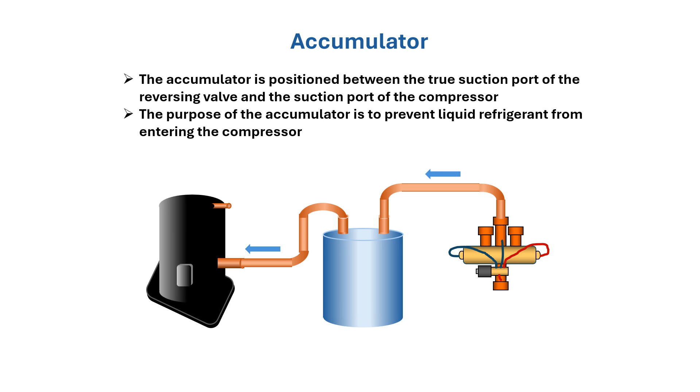In this video, we will discuss the accumulator's function and issues. The accumulator is positioned between the true suction port of the reversing valve and the suction port of the compressor. The purpose of the accumulator is to prevent liquid refrigerant from entering the compressor.

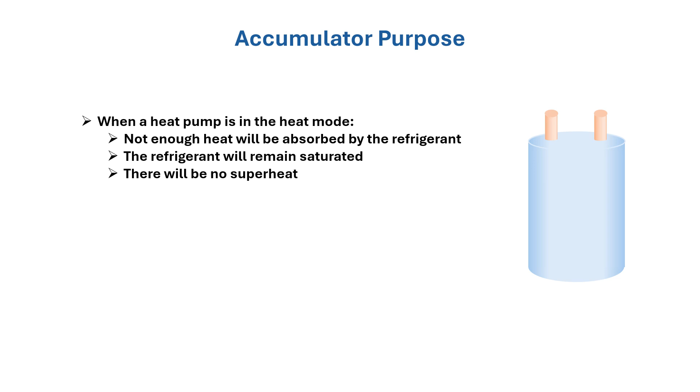When a heat pump is in the heat mode, not enough heat will be absorbed by the refrigerant. The refrigerant will remain saturated, there will be no superheat, the outdoor coil will frost up and ice will build on the coil. An accessory must be put in place to make sure only vapor refrigerant enters the compressor. The accumulator in a properly charged system will prevent liquid refrigerant from entering the compressor.

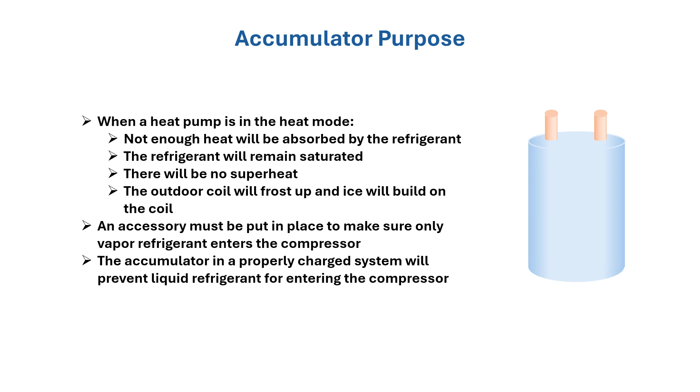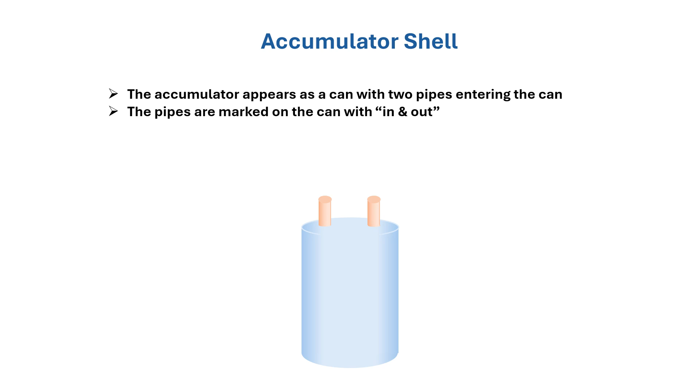The accumulator appears as a can with two pipes entering the can. The pipes are marked on the can with an in and an out. It is important that when replacing the accumulator, the pipe from the reversing valve be connected to the in pipe, and the out pipe be connected to the suction pipe of the compressor.

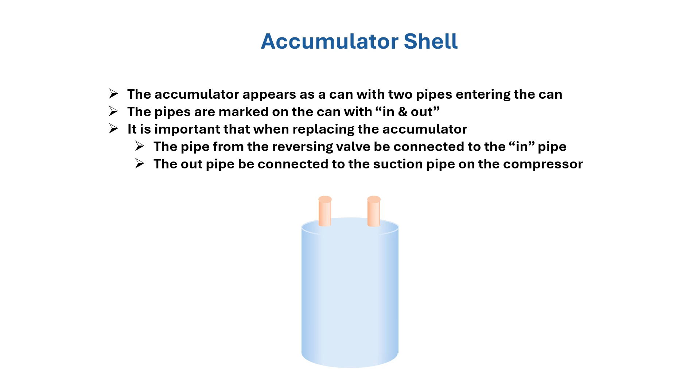The picture on the right shows the pipe arrangement of the interior pipes. The short pipe is the refrigerant coming from the true suction port of the reversing valve, which may contain saturated refrigerant, both liquid and vapor. The pipe with the J bend is the line back to the compressor.

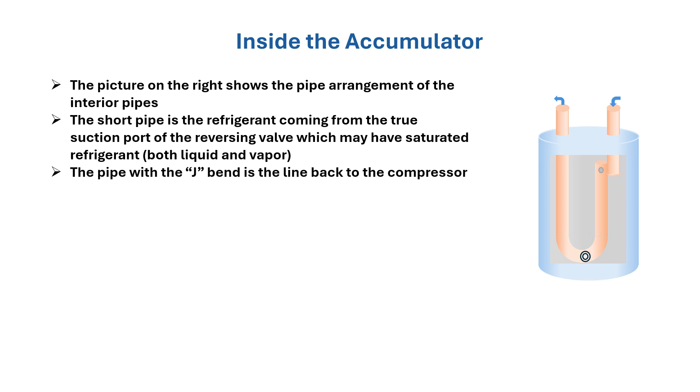At the bottom of the bend is an opening with a screen for oil to return to the compressor along with liquid refrigerant. Behind the large screen is a small opening which meters the refrigerant. The small hole at the top of the pipe is to aid with pulling vapor refrigerant back to the compressor. The top of the pipe is fully open to pull vapor back to the compressor.

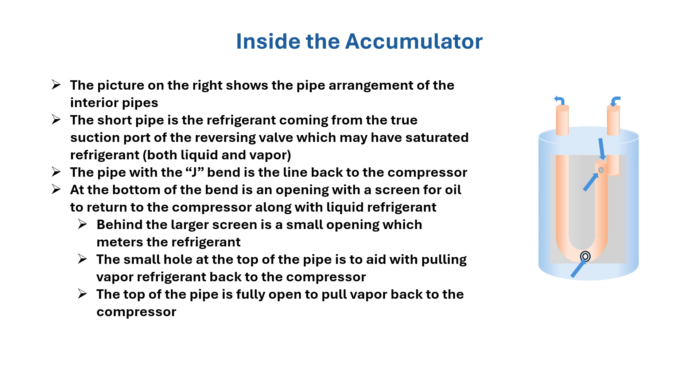When a compressor fails in a heat pump, most technicians may not know the cause of the failure and will replace the compressor and capacitor only. This may be a mistake if the cause of the failure is not known. Oil and refrigerant should be the only items flowing through the system.

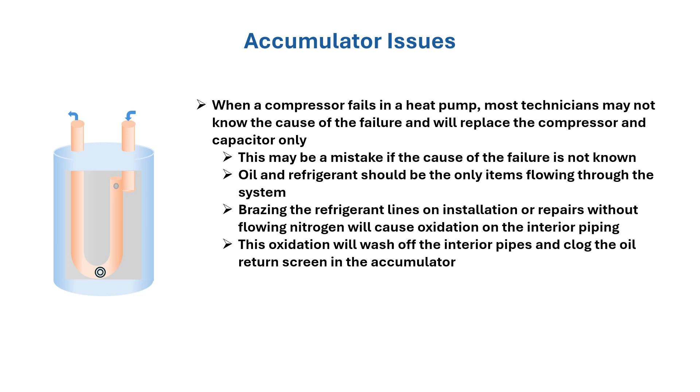Brazing the refrigerant lines on installation or repairs without flowing nitrogen will cause oxidation on the interior piping. This oxidation will wash off the interior pipes and clog the oil return screen in the accumulator. If the oil is not returned from the accumulator, the compressor will fail. It is a good practice to replace the accumulator when changing a compressor in a heat pump.

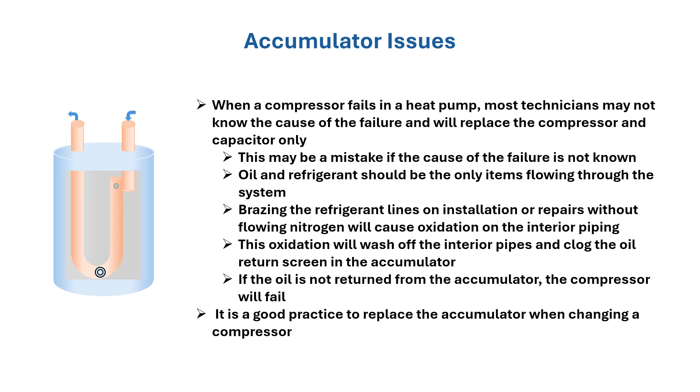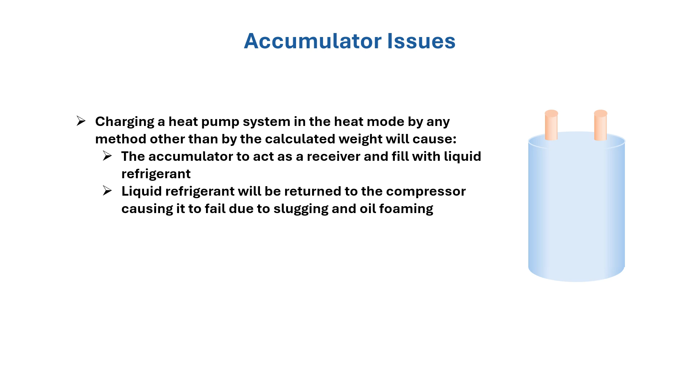Charging a heat pump system in the heat mode by any method other than the calculated weight will cause the accumulator to act as a receiver and fill with liquid refrigerant. Liquid refrigerant will be returned to the compressor, causing it to fail due to slugging and oil foaming. Other issues with the refrigerant system will occur, such as high side pressure increasing. The shell of the accumulator is made of steel and may develop a leak if the protective coating has deteriorated.